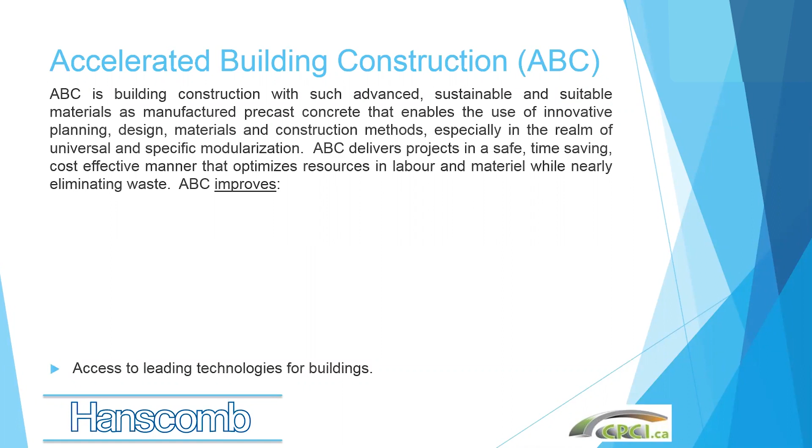Project durability is improved, of course, and you do have access to these technologies, which you find very difficult sometimes to incorporate into site-built projects.

What it does reduce as well are areas with regards to interference with the public. Quite often you can schedule your deliveries of major elements so that it's at the lowest levels of traffic, and peak traffic flow and noise is minimized. In fact, many of these large elements go in very quietly - there's very little noise and bother on site, so interference with the public is minimal. Traffic impacts, as I mentioned earlier.

On-site construction time is drastically improved. One of the projects I was involved with up in northern Alberta looked literally like the project was growing in front of your eyes. It was going very quickly.

Material wastage is pretty well minimized or eliminated altogether. On one project we did, for each building we had one disposal bin for the entire project, and it only had to be emptied once during the entire project. Most of the product came up and was installed without any additional dunnage or wrapping - it just went straight in.

Laydown areas, staging areas, and storage areas are all minimized. If you've got a tight site and don't have much room, ABC can be an answer for you with regard to that.

Weather-related time delays are pretty well almost eliminated, if not entirely eliminated. The project we did in northern Alberta was able to continue construction - we only had to stop at times when the weather got below -40 Celsius, and that was because the crane wouldn't work very well.

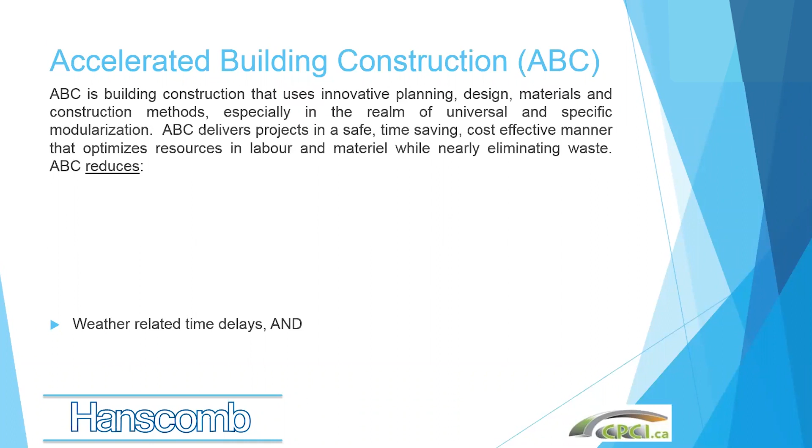And the last part, of course, is financing and borrowing costs go down. If you can return your money to the bank faster, they often are in a hurry to lend it to you. We found there was no shortage of people wanting to lend us money on ABC projects. Once they understand how the project works and how the timelines work, they realize turnaround for their construction funds is faster. The banks have more available resources to you, they're more competitive, and we see interest rates and costs overall going down.

So let me play you a little video here of what the occupiers and owners think of these buildings, not knowing that it was an ABC building, a modular building. In fact, they have no idea.

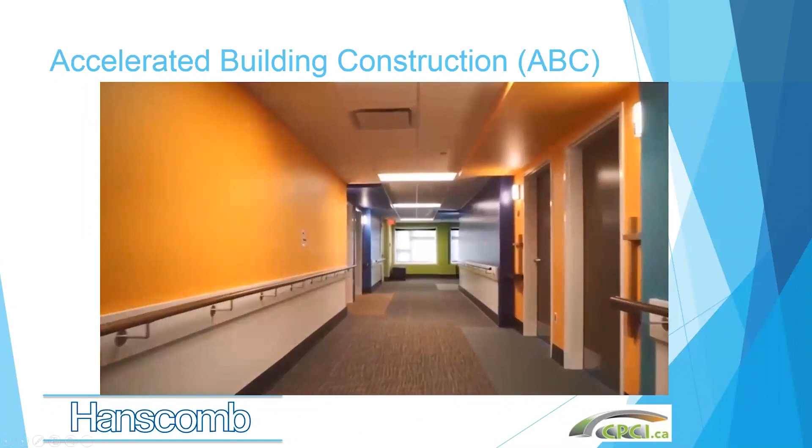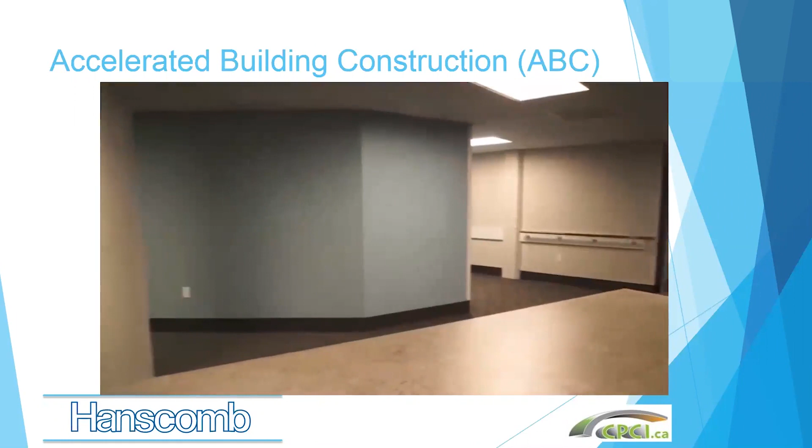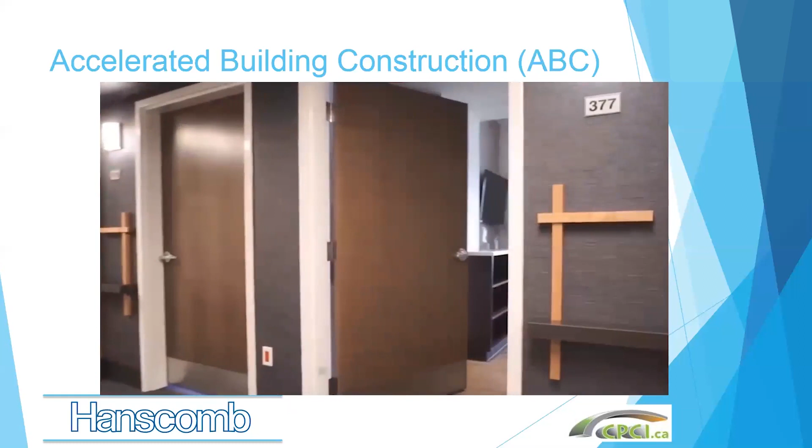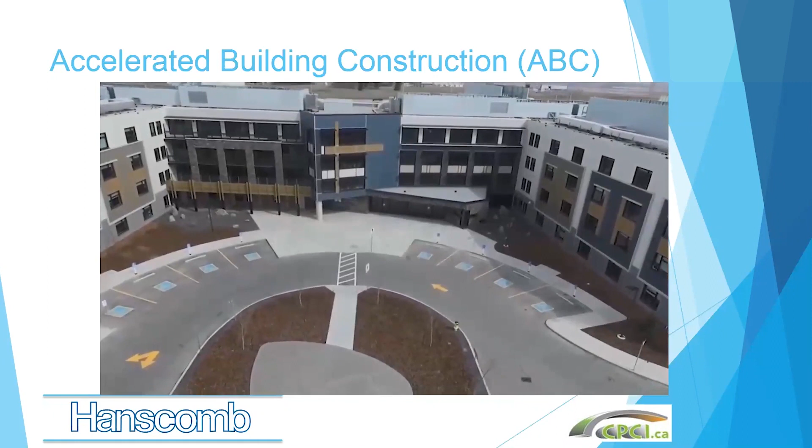Hi, I'm Licia Mullings, and I'd like to take you through our home. Bright colors provide stimulation in spaces specifically designed for dementia residents. Doors are paired together like duplexes with colored porches to provide a wayfinding experience. Upstairs are 6 supported living neighborhoods, each with its own dining space and servery. There's ample room for relaxing and spending time with friends and family. Our residents love the abundance of natural light and the warmth of the interior finishes. Central care stations offer a clear view to all residents' front doors. Each neighborhood has 33 private suites, including some for couples. Come inside. Each has its own kitchen, television, and barrier-free washroom. Secure gardens provide a safe outdoor experience.

It was interesting to note how much she spoke about this modular construction having lots of light, open space, very welcoming. Quality of finish and fit was just right up there - ABC Construction absolutely does very well with regards to the highest level of quality of project you could want.

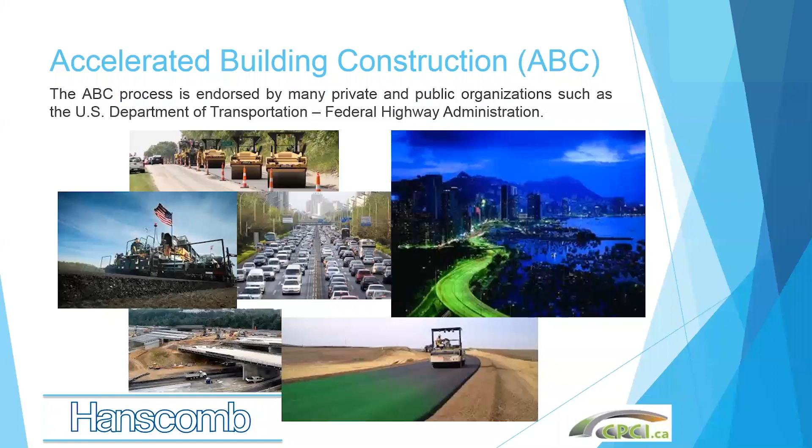So where did ABC really start? Well, actually it was really pushed by the U.S. Department of Transportation and their Federal Highway Administration section. They use a lot of accelerated building construction with regards to the assembly and construction of things like overpasses and bridges, and even major sections of roadways were installed in modular sections through concrete panels being put in the ground.

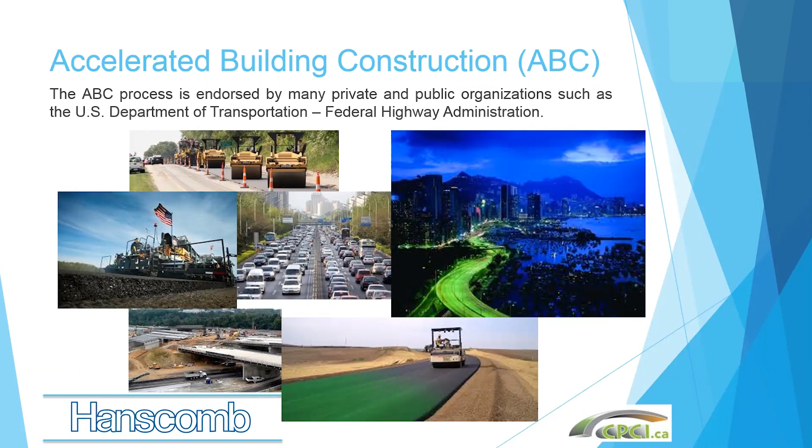This is now, of course, transferred into the area of building construction, and we see modularity becoming a very important element of the future for all types of construction.

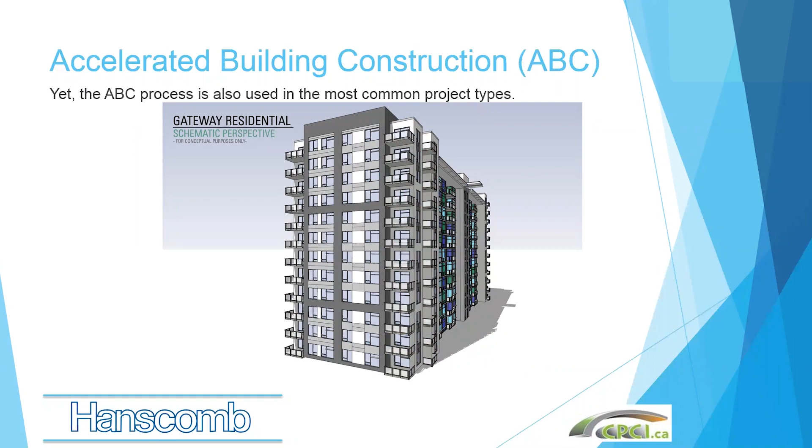This was achieved under this design with developing 3 solid cores of modular precast units that were designed to stack together, lock together. And then between the cores, we had these vertical structural elements that were put up as part of a skeleton, held up temporarily by those little thin green lines, which are temporary steel beams.

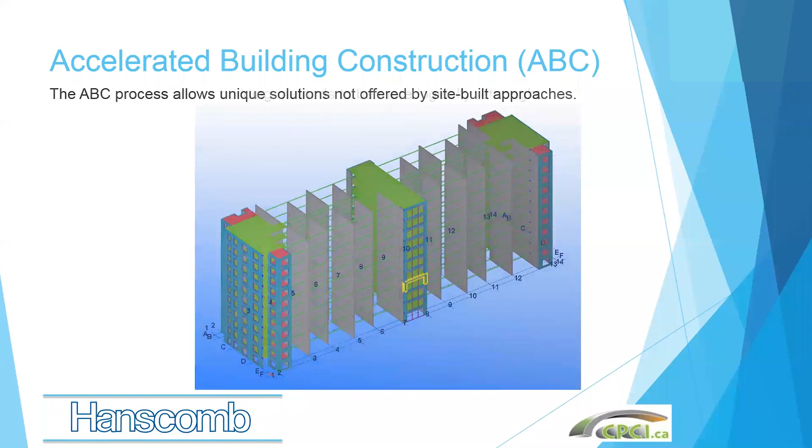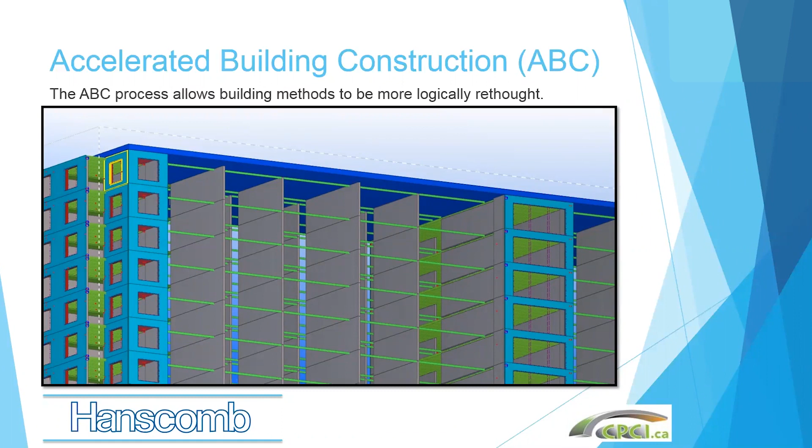The intent there was to build a skeleton on site so that we could really fast track this project once we got to the finishing stages, the fit out stages, where the entire units would be fitted out. So the project would have been built to the roof, and then a structural diaphragm would have been put on and roofed at that time. That created our watertight shell once the units came to site.

The units came to site fully finished. This is just a graphic of what they look like, and they were designed to be inserted into the unit. So a crane would lift them up and insert them to the unit.

If you notice, these units were designed where the ceilings were exposed, and the floor of a unit would actually be the ceiling of the unit below. So everything is designed to be plug and play mechanically and electrically, and counterintuitively, we actually start the construction from the roof and work our way down.

This was going to produce, we expected, up to 20 units a day using this means and method, and all the mechanical and electrical systems were connected at the corridor side. All that was left to finish on site was just the corridor floor and ceiling finishes. Everything else was panelized and finished in such a way that it was part of the unit as it was going in. So we ended up with a very efficient system, and there's still plans to move forward with this.

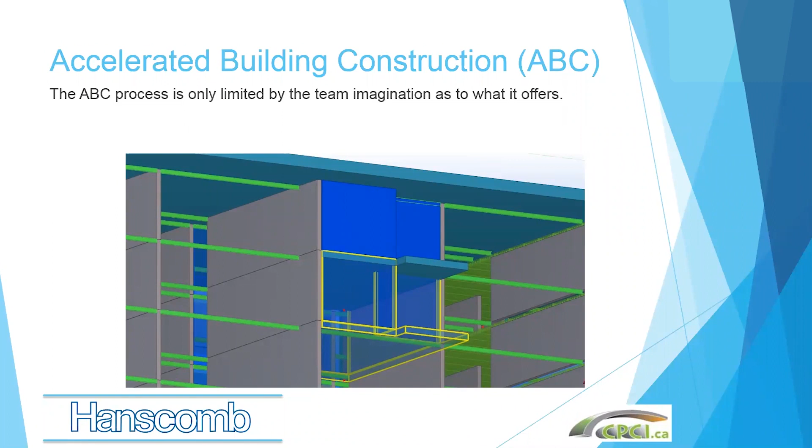The other project in Fort McMurray that we actually did end up building was the Eagle Ridge condominiums. This was built back in 2006, and the developer at the time wanted to try this out. So they started with one building. It was 150,000 square feet and 6 stories tall, with 1 level of underground parking.

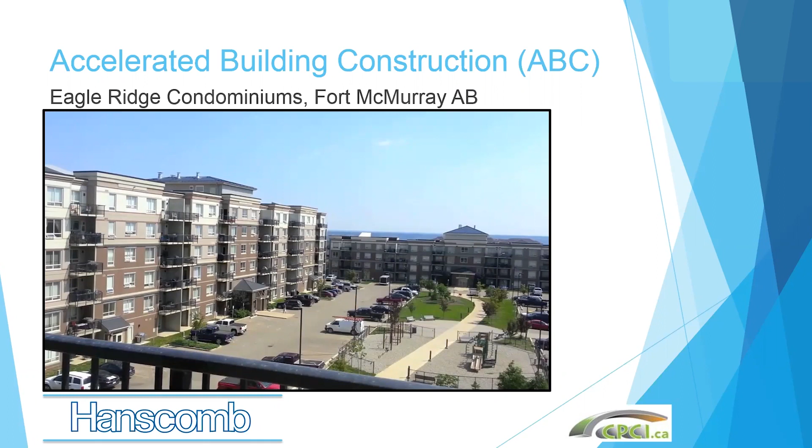We were able to produce a completely finished shell on that project within 55 calendar days with a crew of 6. I was one of them, and I basically sat in the truck most of the time. There was a crane operator and 4 iron workers. At the end of the day, the cost on that project was about 2/3 what they expected to pay.

The outside finishes are quite spectacular, and they actually did really well with the fires that were up there. There was absolutely no damage perceived with regards to these buildings. I think they had the roof burn off one of the units, and that was just replaced, but the units themselves were undamaged through the major fires that they had up there.

It was so successful with regards to the buildings that we applied the same principles on the ABC process, where they had engineered an overpass to be put in for steel. We went to a modular format for the overpass across Centennial Way, and we were able to do the same type of structure at a fraction of the time for $6 million as opposed to 20.

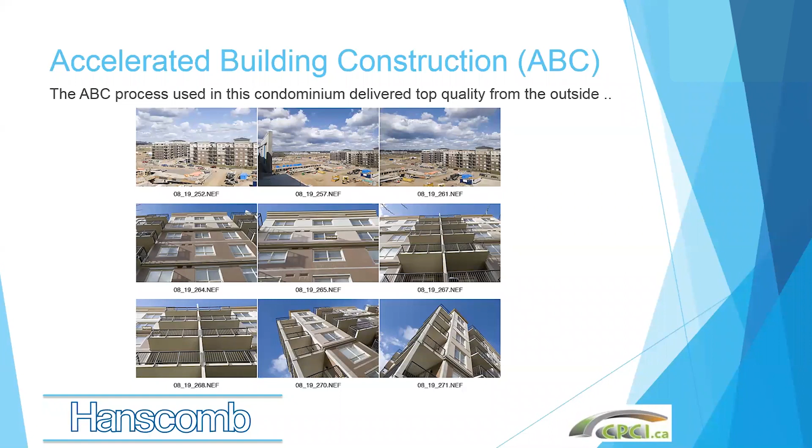Inward, of course, you see these units. They're as good as anything that, in fact, it's considered still one of the best quality projects that you'll find in the Fort McMurray area. The fit and finish in that is extremely good.

We found that when the interior trades were going in to do their work, they had very little concern with regards to making things fit. You don't always get square and true walls in a site-built project, but you do in these ABC projects. So it made it much easier and faster to complete the rest of the installation.

Had we moved forward with more of these projects, we would have brought the units up fully finished and just installed them there.

Now, it's interesting to see what architects have to think about these projects, so I've got another video.

I'm Christopher Babbitts from FWBA Architects.

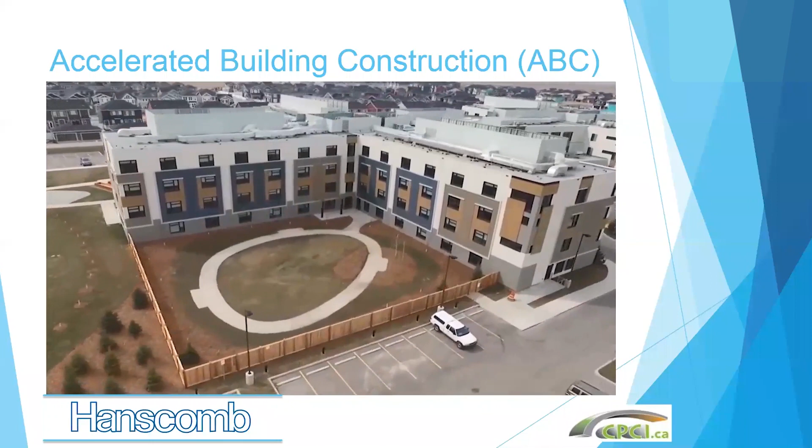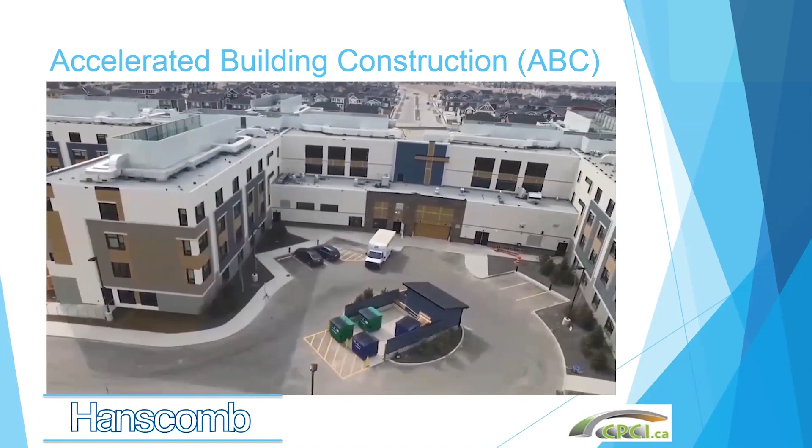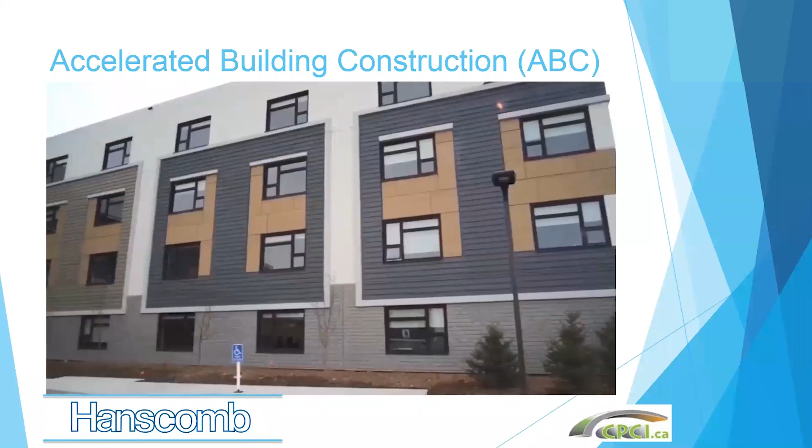The decision to build with precast concrete informed the design, and our approach was to turn limitations into opportunities. Concrete surface treatments and creative use of color, texture, and depth enabled a 4-story design to harmonize with a 2-story neighborhood. A hollow core floor system, together with innovative delta beams, offered us the thinnest floor structure possible. A 4-story design was achievable within the zoned height restriction, which maximized the land value.

As architects, we are always looking for performance, durability, and sustainability. These locally manufactured concrete panels may look like wood or stone or stucco, but have a radically longer anticipated life cycle. This is a place for people.

I think it's very important to remember that regardless of what we're building and what we're building with, it's always focused on the user, the people that will be using it. And the nice thing about accelerated building construction is that it delivers that in so many ways. So here's a few of the case examples I want to go through.

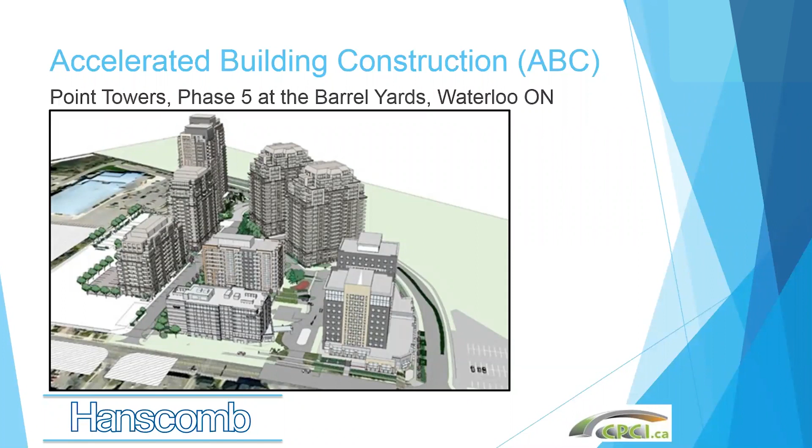Out in Point Towers, Phase 5 of the Barrel Yards in Waterloo, Ontario, we had a developer who had started their project as cast-in-place concrete towers. But the project was starting to get delayed and costs were starting to rise, so we had a pretty savvy owner on this project. They stopped one of the towers, they had a number of towers they're putting up, they stopped one about after the 3rd floor, and they actually went back and spent 6 months redesigning this unit into a modular precast unit, and they let the other tower carry on in cast-in-place concrete.

So you ended up with each of these towers at 25 stories, with 357 living units in each. One was built having really a head start, continuing construction. Once that switched over to the redesign for the precast and they started up again, it actually beat the other tower by 4 months. So even with the delay, it surpassed the construction time of the site-built project. You ended up with really an iconic bit of construction, and the rest of the project all went modular precast because of that.

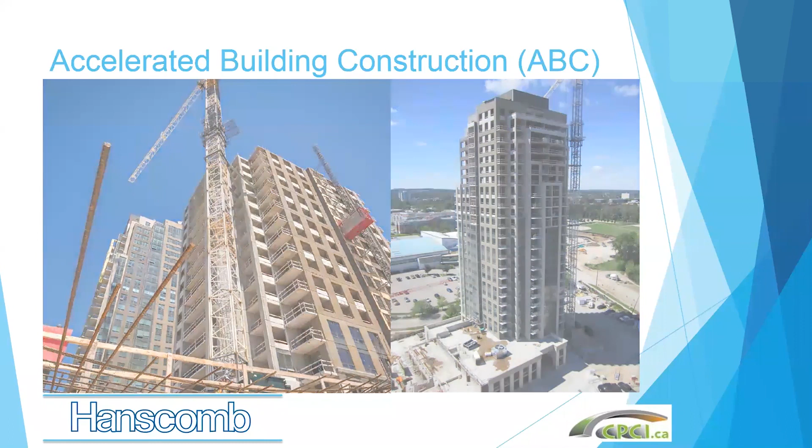Again, you'll notice how clean and how well organized these sites are in a modular format. Normally we would see with any type of site-built construction a lot more storage and activity on site. Actually, all the activity is where it needs to be inside the buildings, and it's going up very quickly. So it's a very clean, very efficient, very affordable, and fast system to build with.

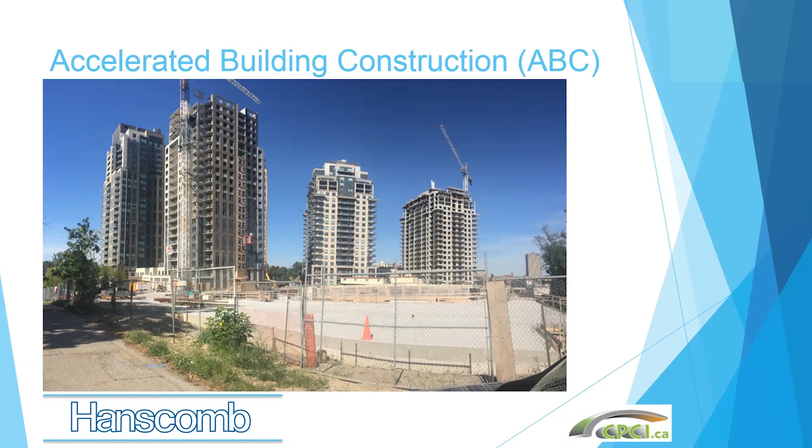In this situation in Kitchener, the designer wanted to go with something that would really make a strong statement on the skyline. So they built 3 distinctive modular towers for the Kitchener area. By using the modular system, they were able to put some very dramatic geometric shapes on the outside. We're seeing elements of that here in Vancouver with one of the towers going up downtown. They're about 14 stories tall for building A, with B and C a little bit smaller, but they all went up fairly quickly.

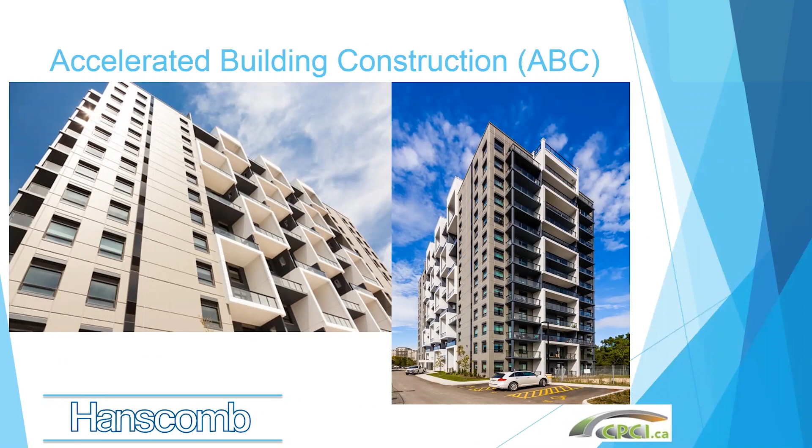Another example of some of the elements you can see in this. Of course, one of the largest elements were these modular decks that go on the outside, and you can see them in this photo. They were the heaviest elements, and they went in fairly easily, and it was a fairly quick process as far as getting this project up.

So this turned out to be a real opportunity to showcase how accelerated building construction can lend itself to really advanced design systems where architects want to make a strong statement. We'll bring that up again later.

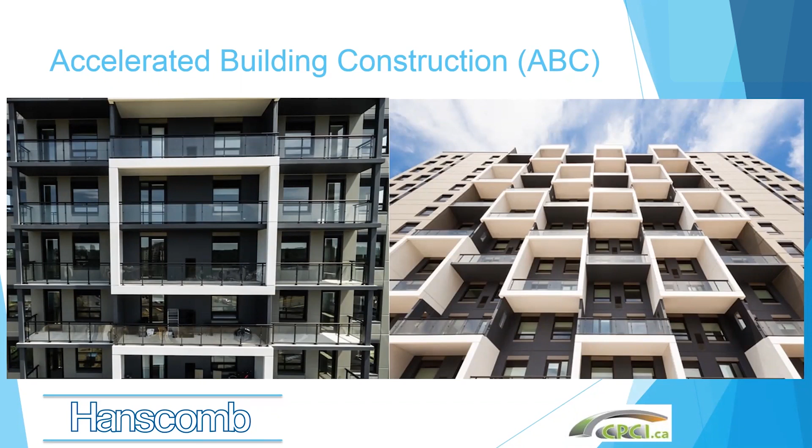On this site, with modular construction, we really had to speak to the heritage of the area, but also a site that absolutely had no free space. 7 stories tall, with a number of 1 and 2 bedroom units, 73 of them, ranging from 530 to 800 square feet. Each floor is about 9,000 square feet.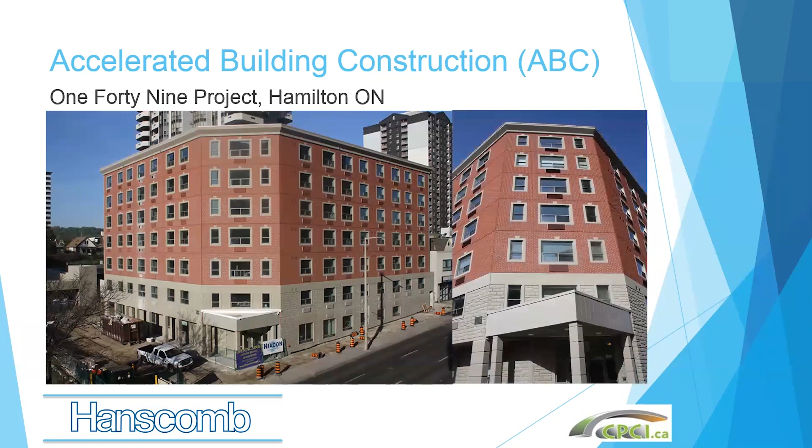Each exterior wall was being installed for every floor within 5 working days. The nice thing about it is they came out with this ready, already built look, so they came out completely finished. You had a really strong sense, and yet we were able to provide that sense of attachment to the heritage nature of the neighborhood.

There were about 64,000 square feet of modular floor area installed, all 25 flights of concrete stairs and landings were modular, along with all modular concrete columns and decorative cornices. This basically went together like a large Lego set, and did so without taking up any land space on the site, because there was no land space for the site.

The benefits of doing something like this in a tight city area is that traffic and everything was considered, and all the deliveries were done in such a way as to minimize the effect the construction would have on the neighborhood, making it actually quite a reasonable project for moving forward with projects in a tight urban setting.

Contractors really like that ability to have flexibility working on site. So let's hear from the contractor.

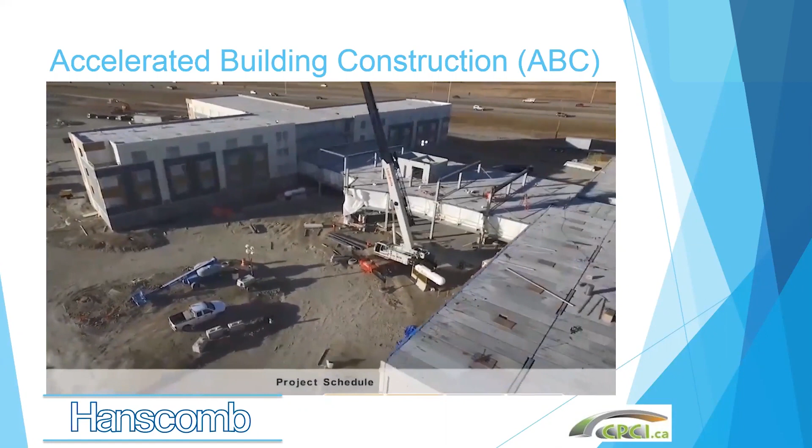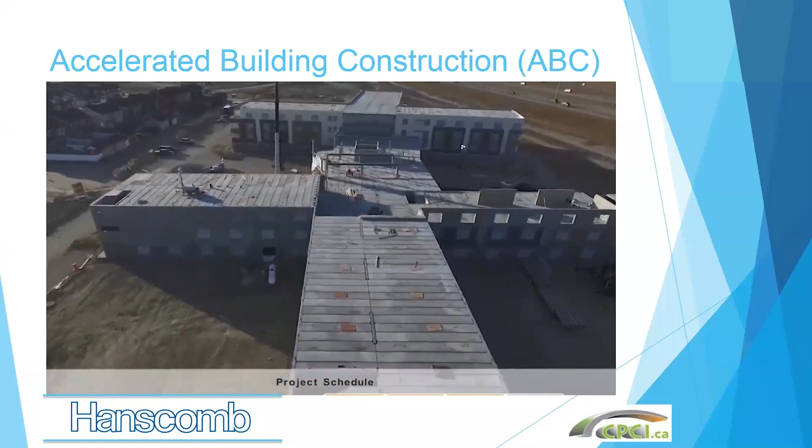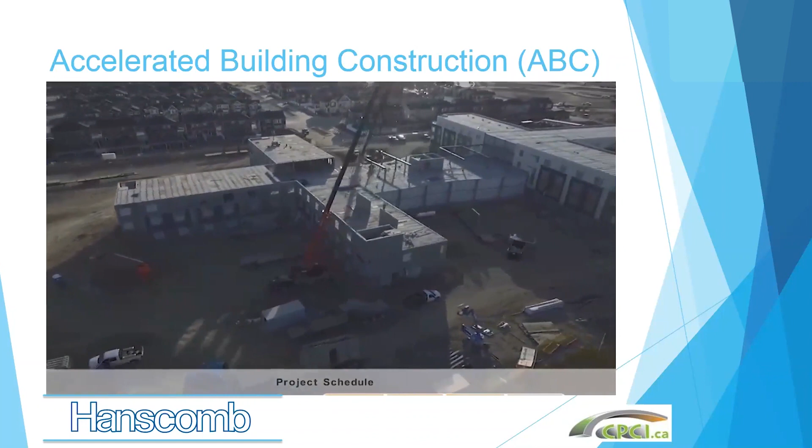Hi, I'm Kevin Juby from Manshield Construction. We built this. The way this project was designed allowed us to construct faster than conventional methods. Our mechanical and electrical trades, which are key to the process, were on the first floor snapping lines and starting rough-ins while the precast on the 3rd floor was being built. This system provided us an enclosed structure and a controlled environment which afforded our teams maximum productivity through the winter months. I believe we have helped Covenant Health set a new standard for care facilities moving forward.

It's very interesting that today we've moved even further along beyond that. A lot of these modular projects are now coming together with all the fittings and fixtures already in the units, and they're being installed that way. But even with the most basic shell construction that we've shown examples of, the cost savings, the improvement in quality, and the time savings are spectacular.

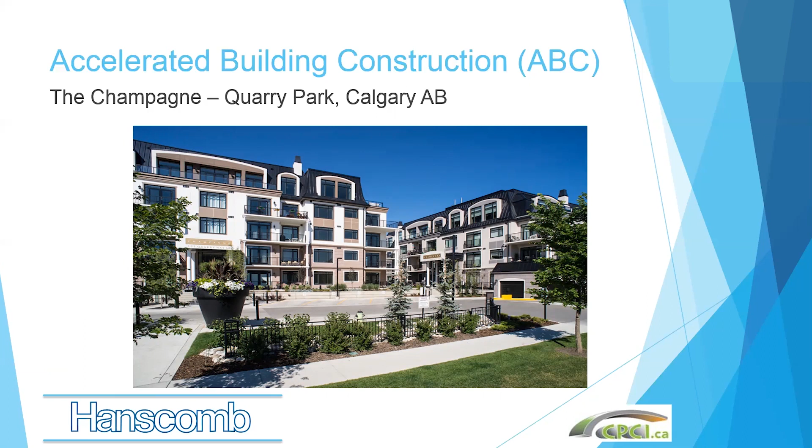A good example of something that's quite interesting, where it doesn't look like traditional modular construction, is the Quarry Park project in Calgary. Here we're looking at a real French provincial design. Not everything's a straight line, and that works very well in a modular setup, because the ability to create true curvature, standard, consistent forms and shapes, and maintain that high level of quality is really exemplified in a modular format, because that's all done in a factory setting with quality control. And it doesn't cost the project in time or in cost—you can get many of these benefits ahead of time with proper planning.

Again, a very visible site right by the river's edge. Concern was working around a site like this where potential construction activity could cause siltation in the river, and of course you're right in the middle of a residential area that's quite popular and busy. They want to have something that's as little trouble as possible.

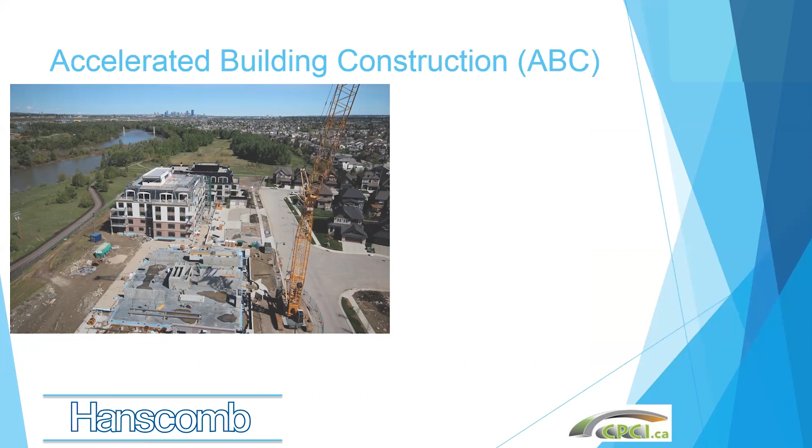So these 4- and 5-story projects with these really unique upper levels required special attention to the building envelope system, which came as part of the entire structural wall. So you had 86,000 square feet of R20 insulated exterior walls, and the windows were already installed. All these windows in these manufactured settings are smoke tested, which you don't get on site, and as such you get better quality construction—everything's designed to fit tighter.

The basic system we have here allowed this project to be built right up against the green space, with minimal interference with the community, no interference with the green space, and in a very short period of time with very little fuss or bother.

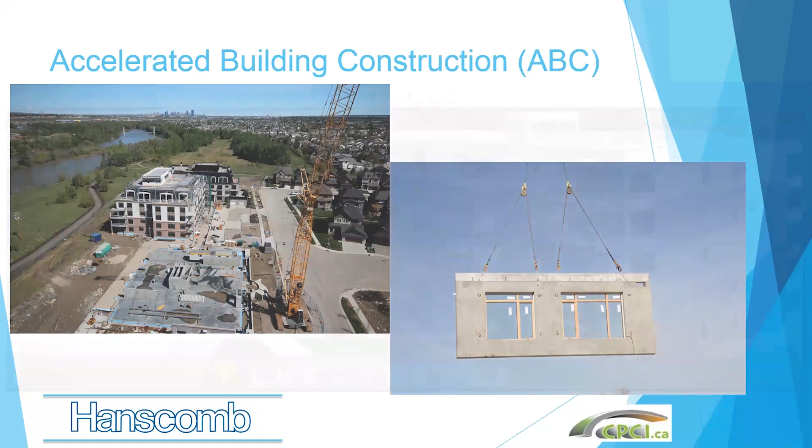But it is a hybridized project where we're actually working with different materials, not just precast concrete, but other modular systems that are designed to enhance the abilities of different modular systems to work together.

They also used an advanced slender wall precast system for the building envelope to create more space with minimal amounts of structure interfering with that space.

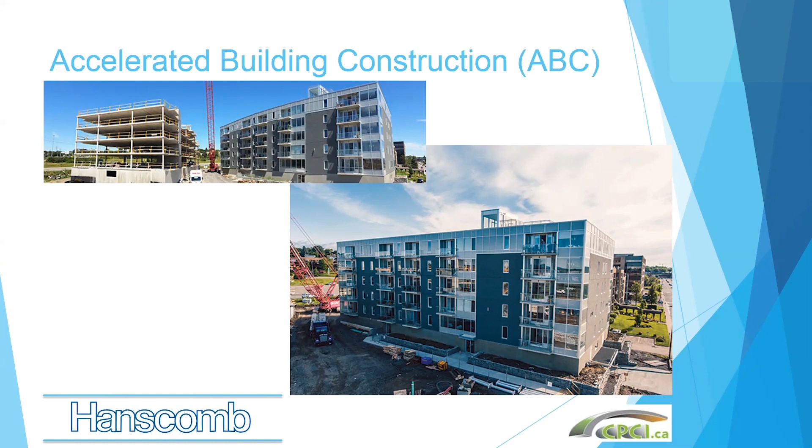You can see in the picture, on the left upper corner, a finished building, and how open and how much space is available to you with this type of system. It's fully modular, giving a lot of ability to create interesting, beautiful, iconic open spaces for living. It would also lend itself very well to office construction.

So how does this typical floor progress? In day one, you'd be installing all your composite columns in the Delta Beam systems. In day two, 6,000 square feet of floor goes in. On day three, another 6,000 square feet goes in, and on day four you're just topping off. So in four days, you have a completely finished floor, all your walls, columns, everything's in there, and very quickly you're following behind with your exterior curtain wall and building envelope systems.

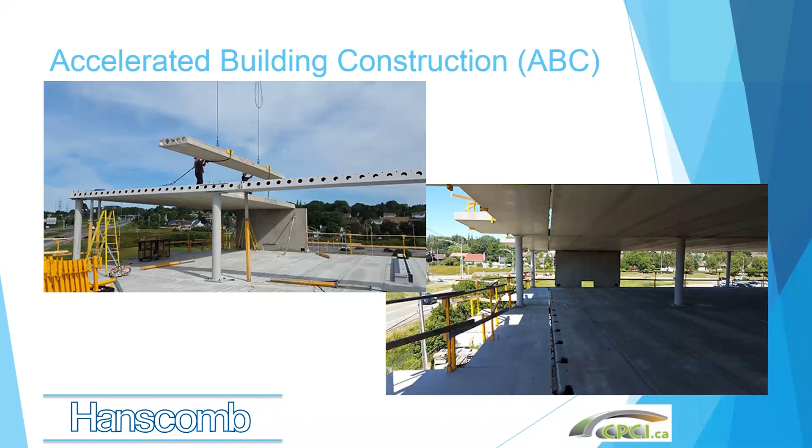Now, a lot of people say, how small can you go with modular construction? Interesting, especially if you're looking at doing something quite unique. They built a house in Calgary called the Woodland House, and this is all modular precast concrete. It turned out to be a huge benefit.

One of the concerns in this area is what do you do with fire? You're pretty close to all the trees, and how do you make something that's going to stand up well and be a good, long-lasting product. What makes this very interesting is that this project was a fraction of the cost of what they were expecting to spend for a custom home. It was quite a bit less cost-wise to do this in a modular format, have it shipped to site and put together, rather than doing more damage with interference on the site and building on site, doing something that would have been a standard custom home.

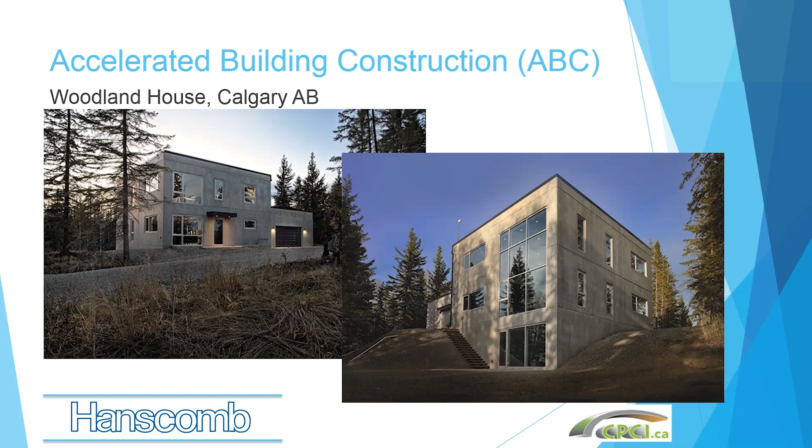So they were able to take the approach of using modular format and put it into a smaller scale and get the benefit of it. There were 2 stories to this project, 4,100 square feet, very ultra modern. You'll notice that from the outside it has a very practical, almost neo-industrial look. What you end up with, though, inside, are these polished concrete walls, polished concrete stairs.

Lighting is often part of the modular system itself. You end up with these very large open spaces, and it really allows that counterplay between the natural surroundings outside being brought in, counterplaying against the very clean, very ultra-modern, minimalistic look of the modular construction.

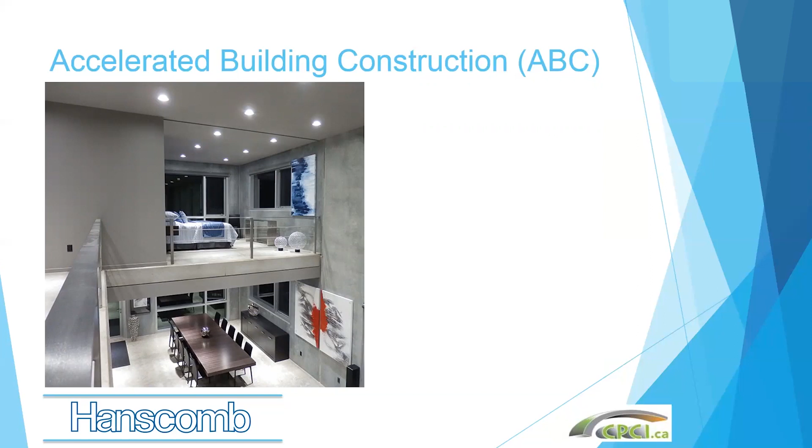It was about 40% less to build a project like this. They had soundproof walls rated R20, and R45 for the roof, in fact up to R50. Basically, you ended up with a top-of-the-line project that was 40% less than what they expected to spend, and they ended up with something far better and more long-lasting than what they were expecting to get.

I've got a new question here: what do engineers typically do to withstand the shear in hollow core and delta beam buildings? I'm not an engineer, but it's in the detailing of how they're connected. The delta beam has a fairly large flange, so much of that shear is dealt with through the modular, hybrid design of delta beam, which is designed to work specifically with hollow core. It's a real opportunity to put something together here. I can't answer in detail, but a structural engineer could get into the specifics. I know they have ways of bridging that, and delta beam is designed to really deal with shear in those sorts of matters.

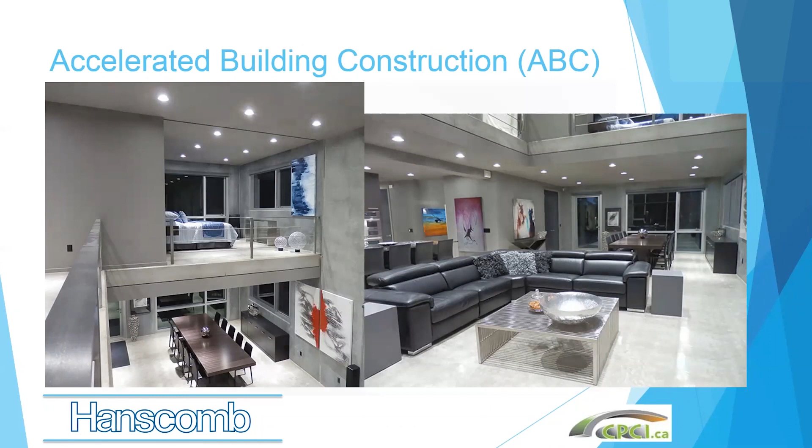Now, since we've been talking about precast concrete, we should hear from the people that do the precast concrete. It's interesting because in this video you'll get a real feel for how quickly things go together. It's not quite as fast as this video, but it isn't far off.

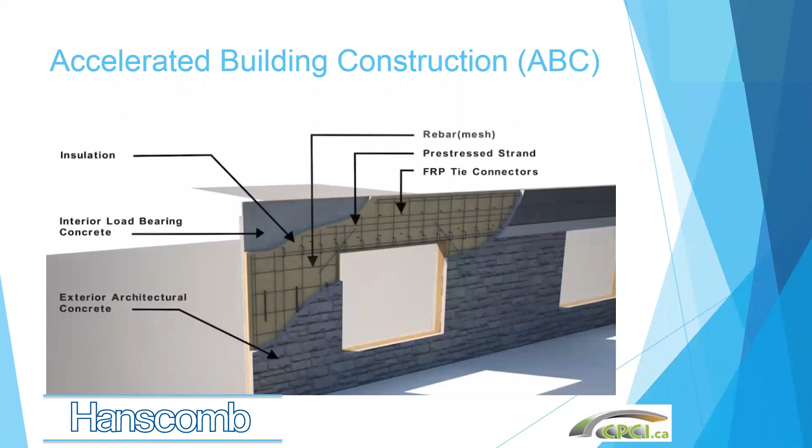Armtec Precast found a need in the continuing care market for a fast and sustainable construction method. Our solution begins with an insulated sandwich wall panel, which includes an exterior concrete skin with variable finishes, a continuous layer of insulation, and the load-bearing structure. Having the structural mass of concrete inside the insulation enhances the thermal storage properties of the wall. The pieces are built off-site in a controlled environment with tight quality control. The beauty of the design is the repetitiveness of the construction. After it's coordinated through a BIM model, it's like putting together a Lego set.

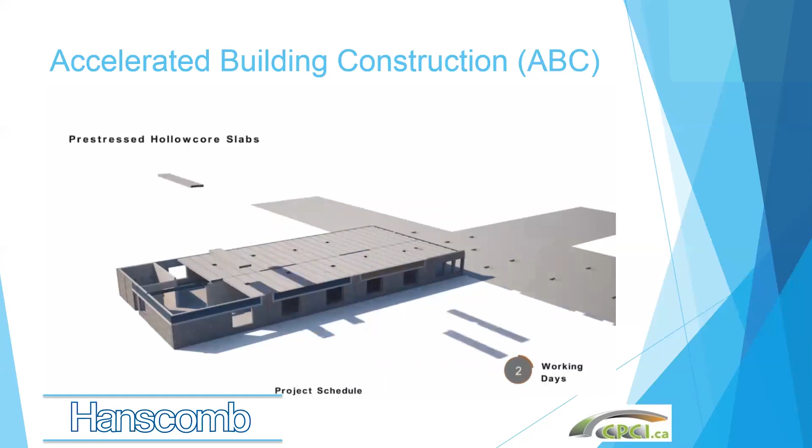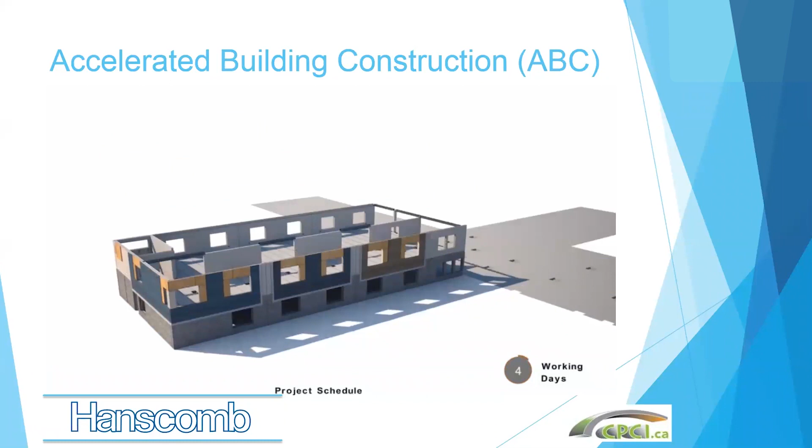We were able to build the shell of the building in no time at all, allowing the contractors to do their work inside. While one wing was being built, another crane was already starting on the second wing. The precast construction continued from the main floor to the roof, including all pre-stressed hollow core slabs, columns, delta beams, stairs, elevator shafts, and wall panels. We were able to construct the building in 4 months, compared to a conventional construction time of 16 months.

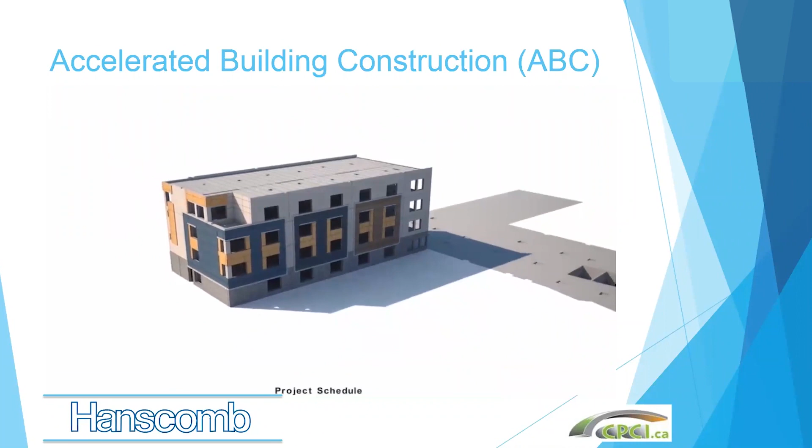Obviously precast concrete is a natural product for accelerated building construction. I don't want to sound like I'm just selling for the Precast Institute. I'm a fan of the product, but there are other materials out there. This is why we're seeing the hybridization of different materials coming together to allow accelerated building construction to move forward. In fact, the first modular building material was really masonry. Bricks were one of the first. The Great Wall of China is made of brick, and it's still there because humans naturally want to find easier, better ways to build something with quality. There's a lot of history in this.

You might recognize this photo. This is from the Expo site in Montreal. This is Habitat, and Habitat is all modular precast construction, and it's actually a world heritage site because of that. It proved this approach as a real advantage for the future of construction. Many of these pieces are actually interchangeable, so these modular prefabricated elements...

They basically replace in-situ site construction. You can imagine how difficult this project would have been had it been built on site, considering the number of places where it spans over open spaces, and the amount of safety, extra rigging, and scaffolding you'd need. Actually, this went up with almost minimal involvement of workers on the outside of the space. They were able to connect it all fairly quickly.

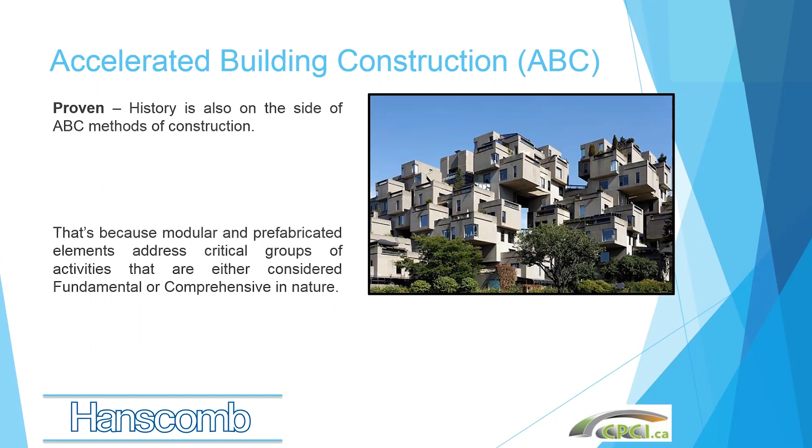Because you're using modular prefabricated elements, you address these critical groups of activities and consider all the fundamental, comprehensive elements that are important. This was completed in 1966, and it became an icon for Canada's Expo in 1967 for the World's Fair. It was a real historic monument for the Quebec government, and it really showed how precast in a modular format could do it.

Now, the Canadians aren't the only ones who have done this. I've got other questions coming in, let me take a quick look. Are the R20 walls nominal or effective value? That's a detail I don't have the ability to answer right now.

We'll come to that later. I believe it's an effective value, but it's pretty consistent in that there's very little thermal bridging with these systems.

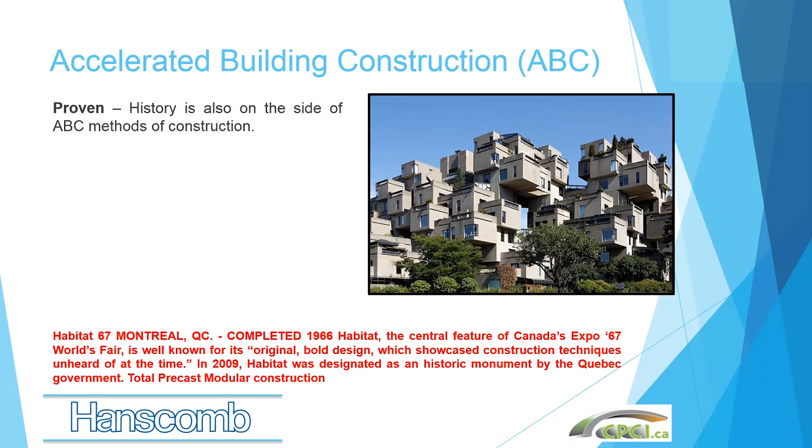Another project which is quite famous, in fact it becomes one of the things to do when you're in San Antonio, besides eating at their wonderful restaurants and doing the Riverwalk, is the Hilton Palacio del Rio Hotel. This project, 21 stories, is built fully modular.

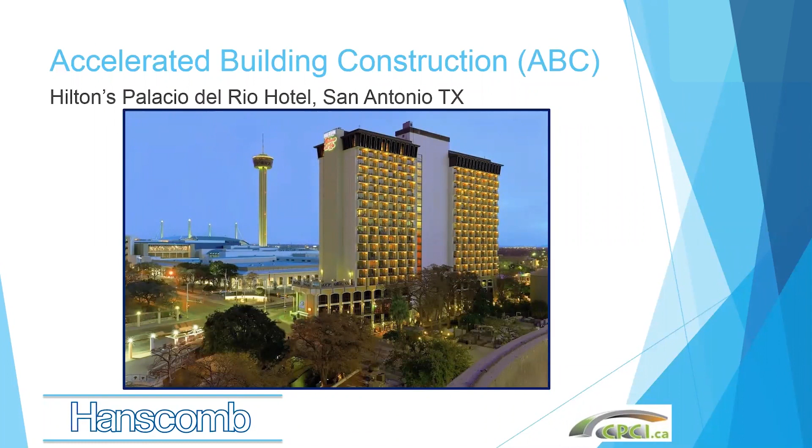And it provided a project. It's part of the tourism attraction. It was 230 feet tall, had 496 rooms. When it was under full construction, it was putting in 17 units a day. And there's a photo of what that looked like back then.

And the principles are still there. The materials have advanced way beyond that, but the principles are still there. And it's still considered one of the icons of San Antonio, and they make a big deal of it as one of the big things you want to go see, because this project went up with a very small crew, very quick, and the manufacturing plant was just 8 miles from the site.

In fact, the intrinsic values left over by these projects where they institute ABC are often businesses retained in the area. They really improve the economy of certain areas. So one of the things ABC does promise is an opportunity to provide additional economic benefits long term.

Where you start with all this is you have to start at the beginning. It sounds very obvious, but what we do is we develop a project charter. And in that project charter, we make the financial and business case work around ABC construction. It's very difficult to make ABC work, although we have examples of it, but it's very difficult when you think about it as an afterthought. The best benefits come if you start from that point and work forward.

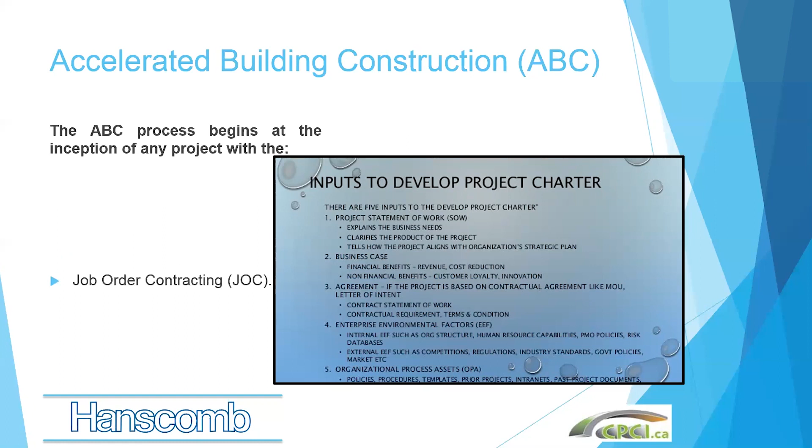And of course, you have to do something called job order contracting. That's a little bit different with regards to how you move forward in your procurement of the project, but it's actually pretty logical when you think about it. It's a matter of having the structure set up and the payment system set up such that it can support modular construction and the development of manufactured products being imported to the site and basically installed on site.

So why are we doing this? It's also one of those things with regards to the integrated design process, which is very popular. Now, we all understand the principles of integrated design. In traditional project delivery, we wait for the architects and engineers to all get done, and then we start building. And then once we start building, we realize we've got some issues, and we have to go back and make changes.

It tends to add cost and time to make that done. It's better to think about this earlier, have everybody on board early, and this is where ABC really shines, because by its nature it requires integrated design. A lot of this stuff requires you to think about it earlier, and the systems are designed to make it easy to think about things early. The accelerated building construction develops systems that are designed to knit together naturally.

You're not forcing anything. So when you do job order contracting under this process, it's basically a collaborative construction project delivery method, and it enables organizations to get numerous commonly encountered construction projects like schools and hospitals done quickly. So with job order contracting, if you're working in a large development phase or for the public sector, you may have a group of projects you all do at once, and you order from a common supplier for certain types of things. Then the integrated design process works with these resources that weren't available to them before, and they can end up with better projects for less money and less time.

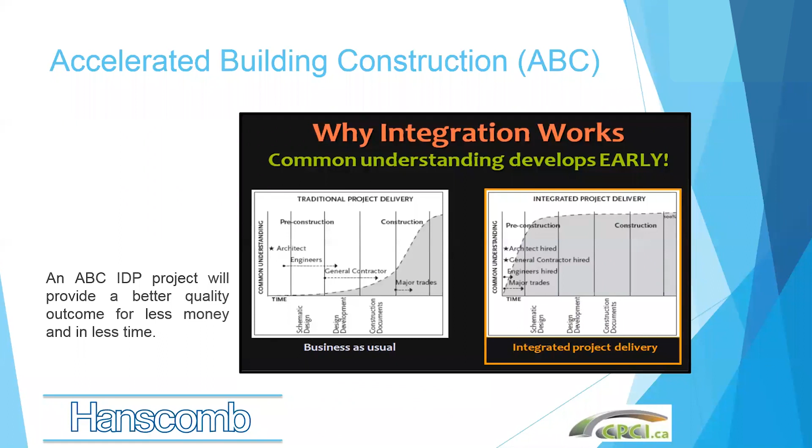On the procurement side, we use subtendering and job order contracting, and it helps reduce unnecessary levels of engineering design. What that means is if you go into a process where you want to get something built with ABC using job order contracting, you're transferring critical elements of the design to subject matter experts. It's still incumbent on the design team to sign off and understand what's being put together, but those who really know how these products go together actually do the design for you.

This not only saves money because it's important that you're not duplicating the work. In fact, you're actually doing the shop drawings before the engineering is done — you do it the other way around. But it also saves time, so everybody's working in parallel, knowing how everything knits together, and the contractors are doing the engineering with their own engineering teams to make sure everything fits. Coordination of this is far simpler than you would think, especially if you work directly from the project charter.

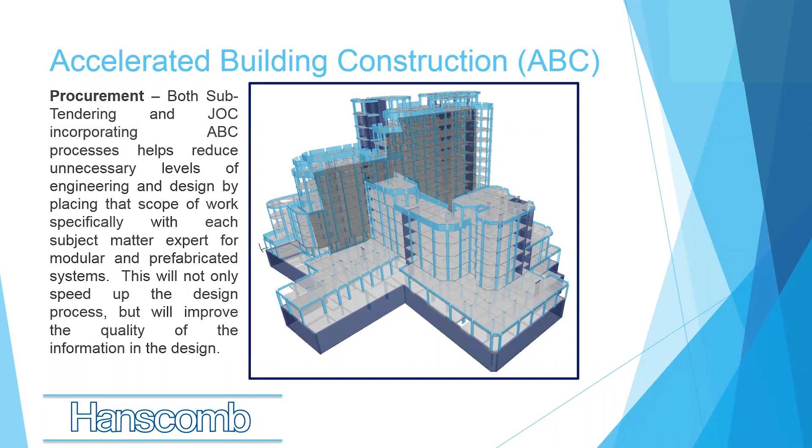Value, of course, is very important, and ABC does deliver that. It relies heavily on incorporating modular units. Because it saves time, saves money, improves your quality and durability, it gives you unparalleled access to burgeoning technologies. A lot of these modular pieces can be made in such a way that you can retrofit or upgrade some of the technologies if it's been thought out ahead of time.

This is very important with regards to various P3 designs where you have a design, build, finance, and maintain process, especially for those in the DBFM P3 format. The maintenance issues improve, the costs can go down if you can continually upgrade a building like you used to be able to upgrade computers and get better performance for less money. This is one thing ABC can provide.

So it can be used in design and construction, and you can also make permanent or movable facilities depending on how you've engineered something. This is one of the things I've been really promoting — the opportunity to use permanent or semi-permanent structures. We're seeing a lot more use of semi-permanent structures here in the area where people are putting modular projects up for residences, and that's moving forward.

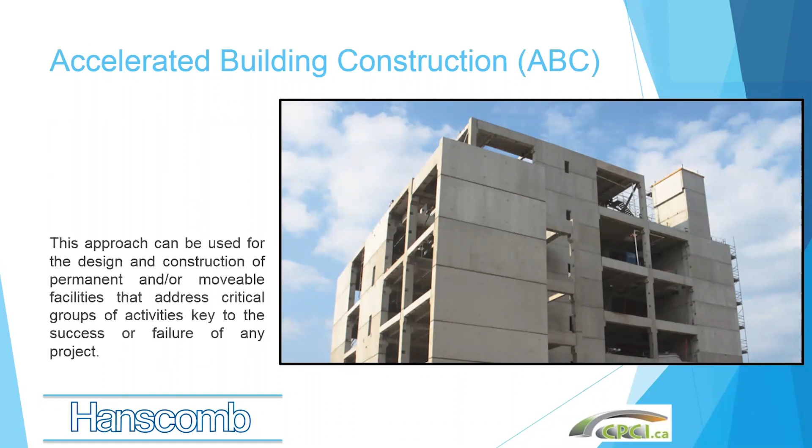Let me just, I'm running a little long here.

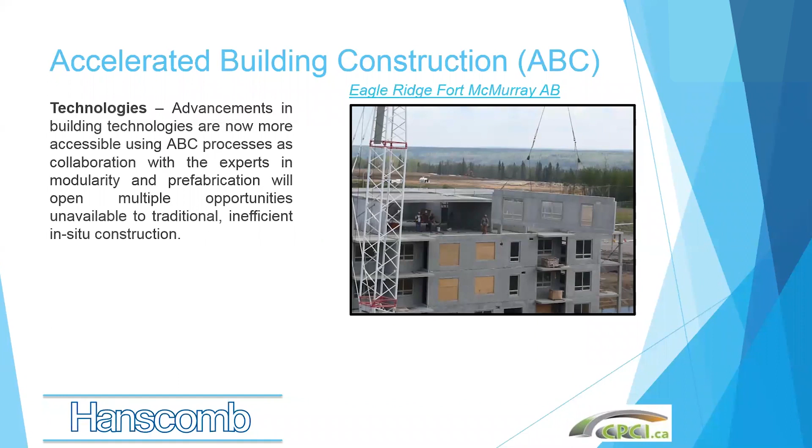All the windows in these insulated wall panels that went up in Fort McMurray had been smoke tested, and that building is extraordinarily energy efficient.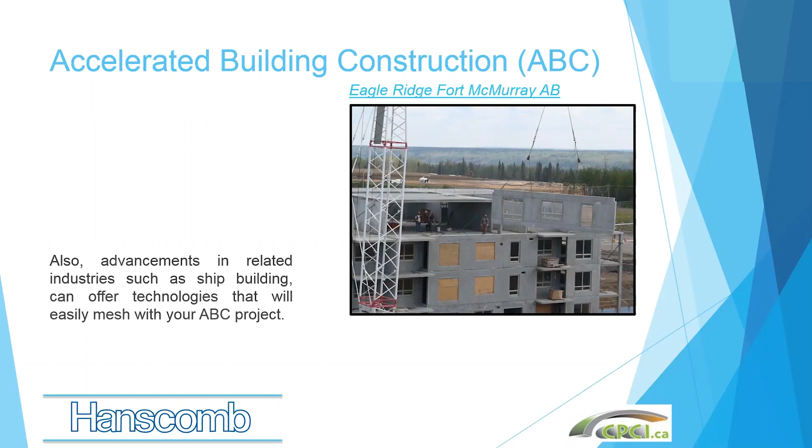It's so energy efficient that one of the things we noticed on site - one project is built up against basically a highway, and across the road is a fire station. We were there watching the fire engine, lights turning, traffic going by pretty busy, and we couldn't hear a thing. We had to open the window to actually hear the engine go by. It was quite spectacular. If you've got that kind of sound improvement from outside noise, you're certainly going to have that benefit with regards to thermal performance, and we've seen that in this building.

Notice how clean this site is - these pieces were literally going up in a few minutes each time. We'd come to the site every day, these trailers would be dropped off, the tractor would pick up another trailer or take an empty one back, and these panels were going up very, very quickly. You can see in the foreground, floor panels and wall panels going up.

You'll see somebody maybe up on one floor - very few people around. You don't really need a lot of crew to put these in; they go in very, very quickly, working a very quick time frame. The delivery worked very much in tune with the just-in-time supply chains we see being put forward, so you don't need a lot of storage elsewhere. This comes around pretty quickly, and you end up with a cleaner, safer, more secure, more efficient site just because of this modular approach.

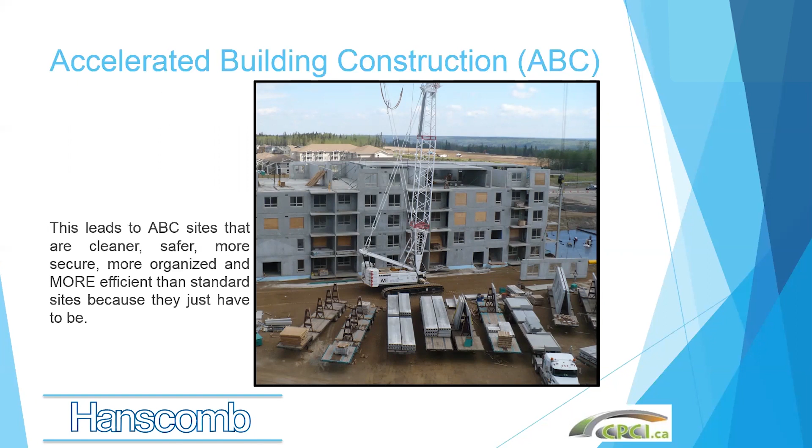Again, logistics is the key. You have to be organized. It has to be done right up front.

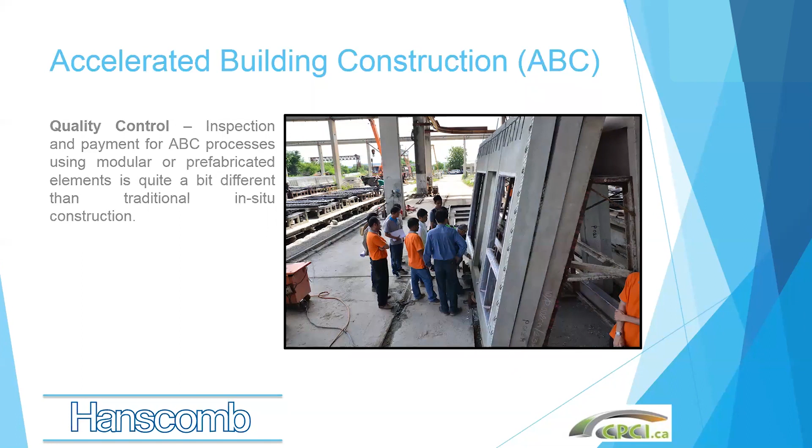Quality control is a big issue as well. Here we have some engineers from out of town on this project looking at the site, the quality, fit and finish, and it was pretty exceptional. We can do all this in the factory. All these panels are designed to be protected and managed so that even during erection or transportation there isn't any damage. We saw very little marking or damage from these panels as they were going up, so you get a very high quality finish.

You also end up being able to do some very interesting things with finishes and textures on these panels that you can't traditionally do in on-site construction.

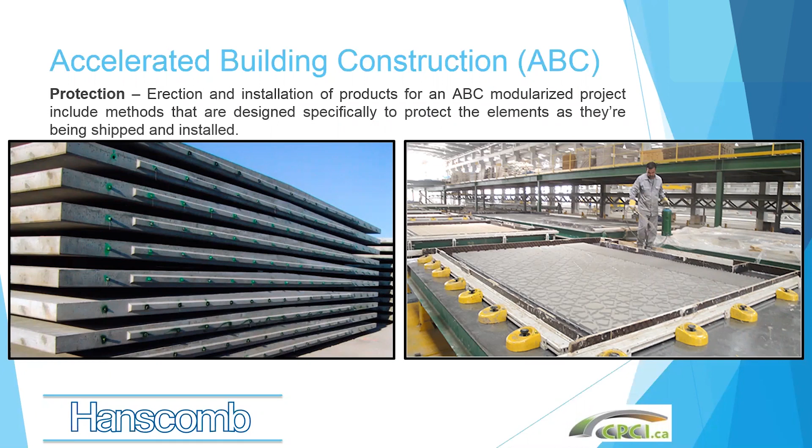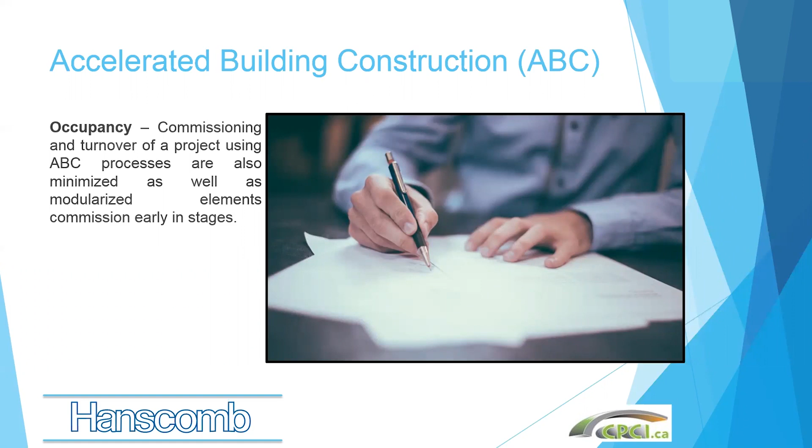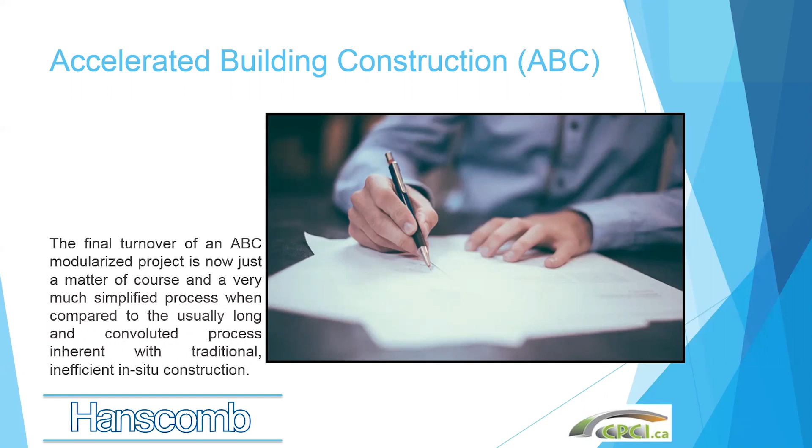Occupancy, commissioning and turnover is much faster with ABC construction. A lot of stuff can be pre-commissioned with the new modular systems going in, so all you're doing is connecting the plug-and-play nature of the elements as they go in. Final turnover of an ABC project is usually just a matter of course, and often the inspections and approvals have been done elsewhere - you're not seeing much in the way of on-site inspections by the authorities having jurisdiction.

Operating costs are quite a bit lower. CPCI has done life cycle assessments on precast concrete buildings in a commercial sense, and they've turned out very favorable. You end up with a product that works very well, is very energy efficient, and easier to maintain.

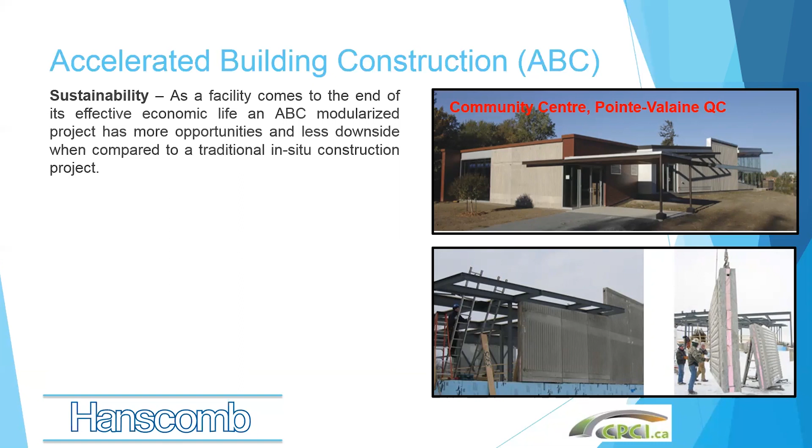Sustainability - in this case, these are wall panels salvaged from a Canadian Tire, repurposed and put into a community center in Quebec. This is the future; eventually everything will be universal modular pieces that you can swap around and put on different projects. This had significant cost savings for the community center, and it kept a good portion of the Canadian Tire building out of the landfill.

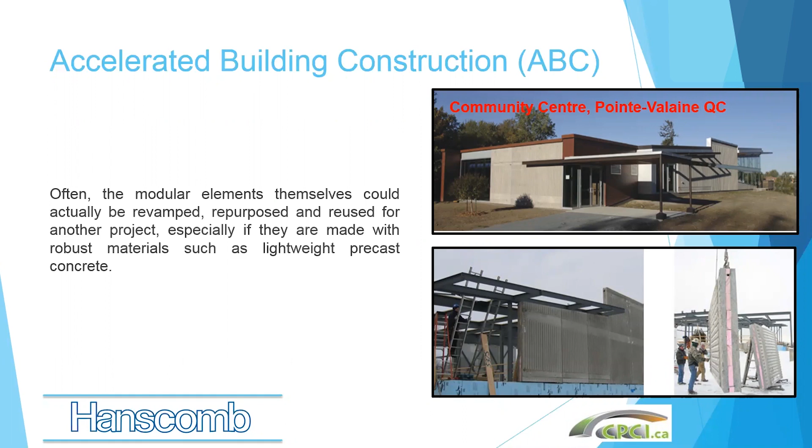So 50% of these walls were basically reused. I did a project years ago for the city of Vancouver where we proved the principle that you can build with used material. Nearly 90% of that building was used materials.

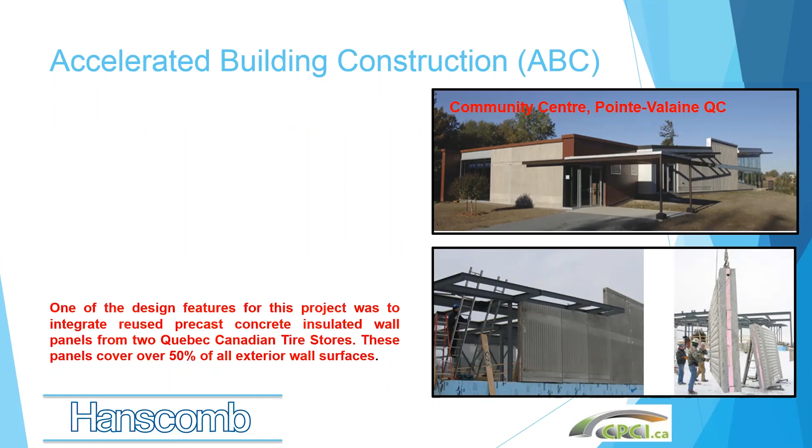In conclusion, precast concrete ABC modular construction has real advantages over anything you might build on site. It's worth considering a different approach. Properly engaged, any ABC project can bring huge benefits, especially in the long term. It also allows you to bring in new technologies you want to incorporate, and it's easier to do so with a modular ABC approach.

So on that note, we're talking about a new time paradigm shift. I'd like to open up to questions, real questions. I've been picking through them as they come up. The last question was about shear and earthquake.

Next question, with regards to precast concrete, is it prone to water ingress? Traditional precast is prone to water ingress, but this is not traditional precast. The detailing that goes into the ABC approach, the edge details and so on, are more complex and designed to seal tighter. You've got an industry that's really championing the modular approach for construction, and they're thinking through all these details as far as water ingress, air ingress, and anything else. So you actually end up with a better quality building.

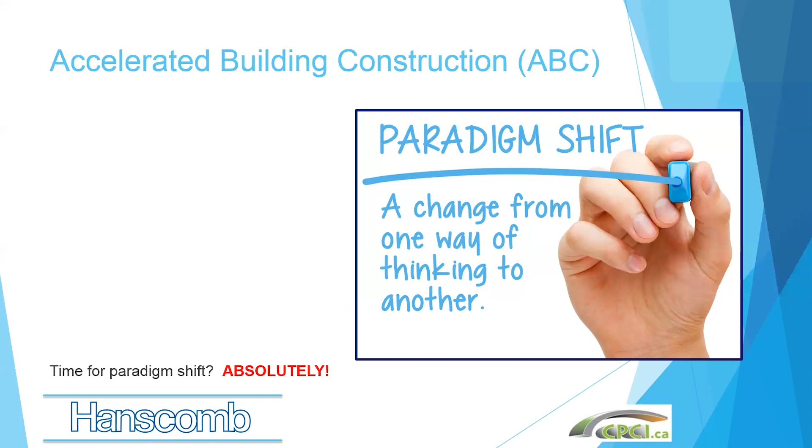Ken, it's Brian Hall from CPCI, one of the panelists. That is actually not true. There's an exception for precast insulated wall panels. Every time I've used sandwich panels, it's never been an issue, so I think we're probably covered with that.

Just to address the question about water ingress within precast wall panels, if you look at the major building envelope firms across Canada, and the OAA indemnity insurance and so forth, there's never been a major problem with precast panels. The only water ingress can be between the joints, even though there are a lot of joints, but it's a dual stage system and the moisture is basically wept to the outside of the panels. If you talk to anybody at OAA regarding Pro-Demnity Insurance, or RDH building consultants, or any major building consultants across the country, we have not seen a problem in the last 40 years. We also have a brand new best practice guide produced for precast concrete, and we'll be running seminars across the country. We also have a thermal calculator, launching in the next few weeks, that will help you calculate the R factor of the whole building envelope.